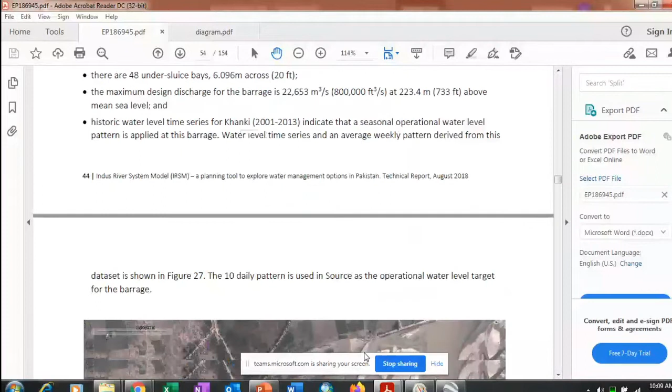I was seeing this aerial view of Khanki Barrage before class. If the cursor moves along Khanki Barrage and you observe the upstream side, there are several islands formed between the guide banks, between the two abutments.

It happens that after construction of the barrage, we provide a width according to Lacey's equation, but the design discharge is lesser than this. The actual discharge is most of the time lesser than the design discharge during most of the year. So sediments start settling, and as time goes on they form small islands, reducing the width of flow or available width of flow.

If the available width of flow is reduced, whenever the design discharge occurs velocities will be increased, creating smaller channels. You can see separate channels upstream of the barrage—one, two, three, four different channels created just upstream. So for the design discharge, velocity will be increased whenever it occurs. To safeguard against this...

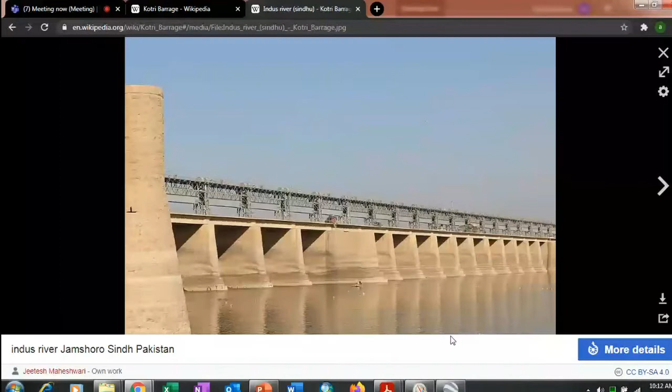Students, it's another photo of Kotri Barrage. We cannot right now see the weir constructed—this is the upstream side of Kotri Barrage. On the upstream side, a pool has been created, so this water will pass through the weirs or below the gates, passing in between these spaces.

The space between each two different piers is termed a bay. Here it's one, two, three, four, five, six, seven, eight, nine, ten different bays. Here is a divide wall—it's a thicker wall, see here.

Kotri Barrage is on the Indus River, located in Sindh province. The barrage was completed in 1955. It's used to control water flow in the Indus for irrigation and flood control purposes. It has a discharge capacity of 875,000 cusecs, whereas in our case it's 500,000 cusecs. It's a gate-controlled weir-type barrage with a navigational lock.

There is a navigational channel—I showed you in the last class, and I'll show it to you again.

The barrage has 44 bays—these open spaces number 44. Each is 60 feet wide. The maximum water level on the upstream side is 13 meters.

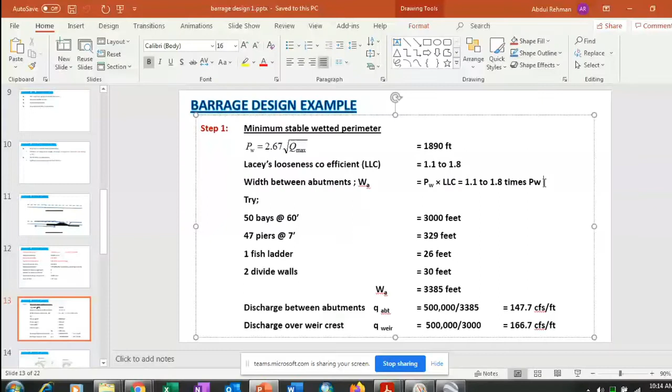We have to proportion that 3,400 feet to accommodate bays, piers, fish ladders, and divide walls. So let's try a few values: 50 bays at 60 feet. For 50 bays, we'll require 49 piers, of which two will be divide walls.

A fish ladder can be provided along the divide wall. Some generally used dimensions are assumed in the book, and you can use the same values. Summing all these 3,000, 329, 26, 30 feet, the width between the abutments is 3,385 feet.

This width of 3,385 feet is just upstream of the weir, and the 3,000 feet is the clear width available for flow. So the specific discharge upstream of the weir will be discharge over the width available for flow on the upstream side, and discharge over the crest will be discharge over the width of the weir available for flow to occur. I have calculated these two discharges.

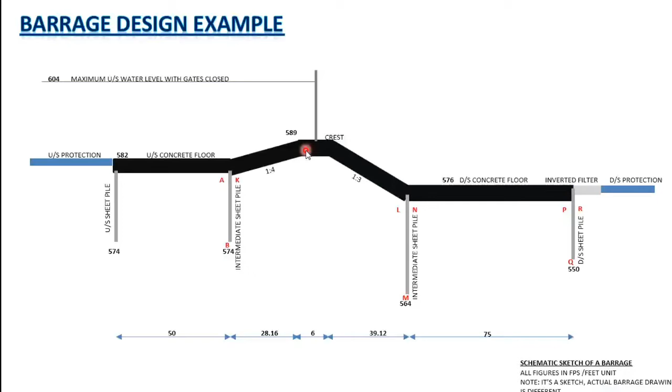It is 589, the crest level that has to be estimated and designed after applying knowledge of hydraulic engineering, which we have already studied. So for that, I'll start by assuming a value of afflux and weir height.

Afflux is the rise in water level after construction of a weir. Initially, the solid line is the riverbed level and the dashed line is the highest flood level. After construction of a weir, the water level will rise. This rise in water level is termed as afflux, and the highest value just upstream of the weir is termed as afflux.

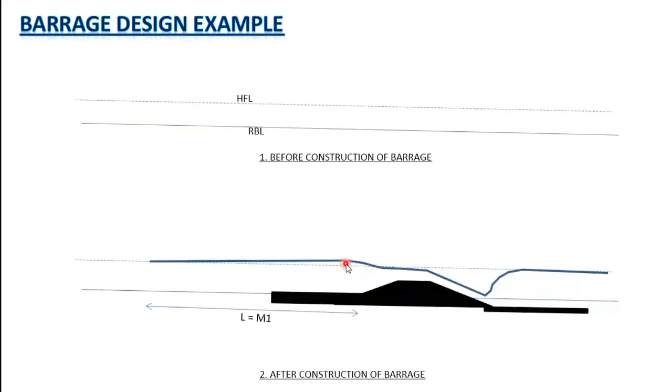We have to start by assuming a reasonable value of afflux. For us, right now doing the first design of a barrage, having not seen any barrage design before, assume this value as 3 feet for your design case, selecting it between 2.5 to 3.5 feet. After carrying out other design calculations and seeing what is actually happening at site, you can easily estimate this afflux value. This assumption is based on technical experience.

Another weir height is assumed as 6 feet. Both these values are assumed just by judgment, engineering judgment and experience.

Scour depth is the depth of flow after scouring has occurred. Please remember this thing, that scour depth is depth of flow.

If I mark scour depth on this sketch, scouring or erosion has occurred and it has created a pit like this.

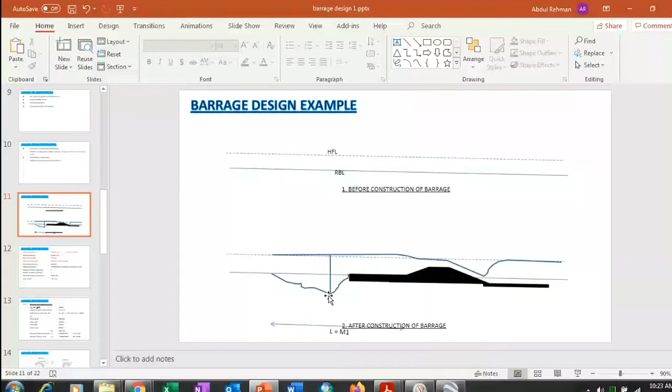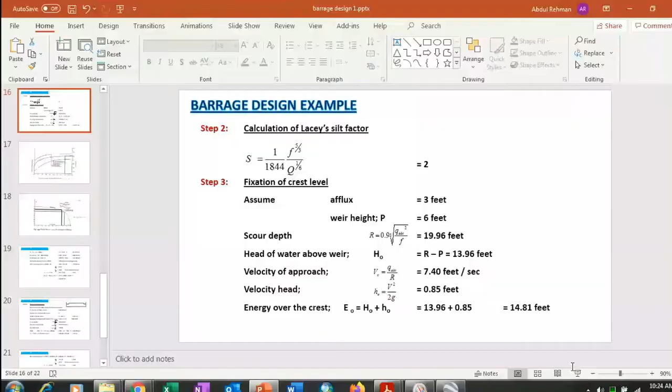For scour depth, Lacey's theory gives us an expression for calculating scour depth, that is 0.9 times cube root of discharge squared over Lacey's silt factor.

Here, which discharge should be used? In the last step, we calculated two values of discharge: the discharge just upstream of the weir, and the discharge passing over the weir. Any guesses which discharge should be used here for calculating scour depth?

Upstream wala, exactly, upstream discharge. Upstream is the discharge between the abutments. That is also mentioned here.

The scour depth is 19.96 feet. At 19.96 feet, this means the riverbed level is expected to go 19.96 feet below the highest flood level.

Head of water above the weir: in this case, I can say that head of water is depth minus height of my weir.

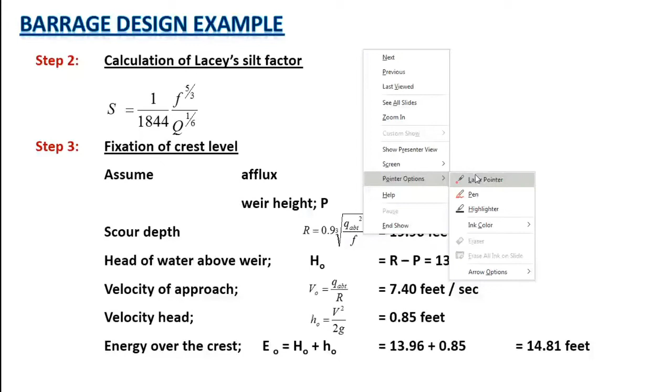Scour depth is the depth after the scouring has occurred. We are considering an adverse case scenario. The head of water above weir is calculated as the depth of flow, considering the depth of flow as the scour depth, and P is the assumed height of weir.

13.96 is the depth of water above the weir.

Velocity of approach will be discharge over depth. Discharge is the upstream discharge, or discharge between the abutments, and depth is the scour depth. This gives velocity of approach. Velocity head is v square over 2g.

Energy or specific energy over the crest is depth plus velocity head. In our book, the depth has been denoted as static head by capital H, and small h is denoting velocity head. So capital H, head of water, plus velocity head.

The total specific energy over the weir crest is 14.81. By our assumptions, we have calculated a value of specific energy which will be available over our weir crest.

E1 is denoting specific energy upstream of the weir. In the last step, I calculated specific energy over the crest. Next, I am calculating energy upstream of the weir crest. On the upstream side, I have in the previous step calculated velocity of approach.

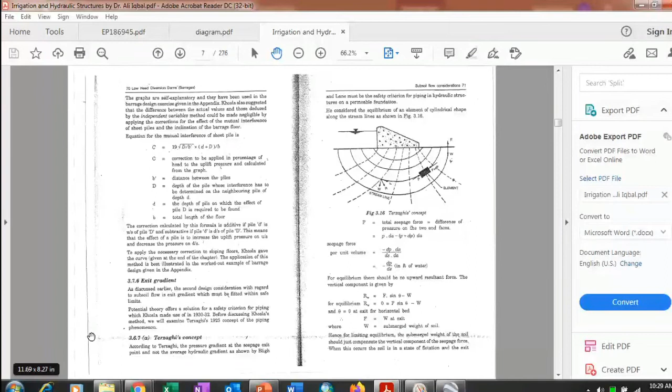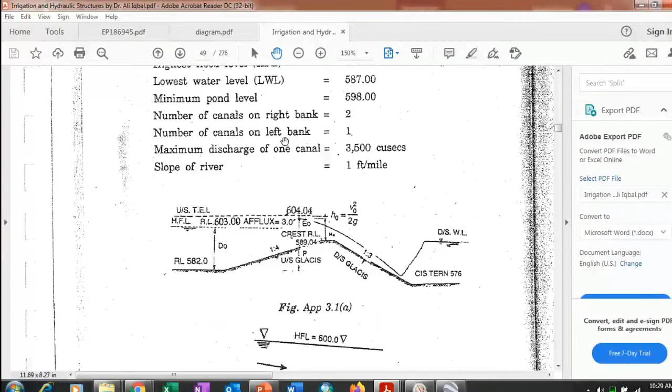In your books, this is explained on this sketch. Total upstream energy level has been calculated. The difference between upstream energy level and the specific energy over the weir crest decides our crest level of the weir.

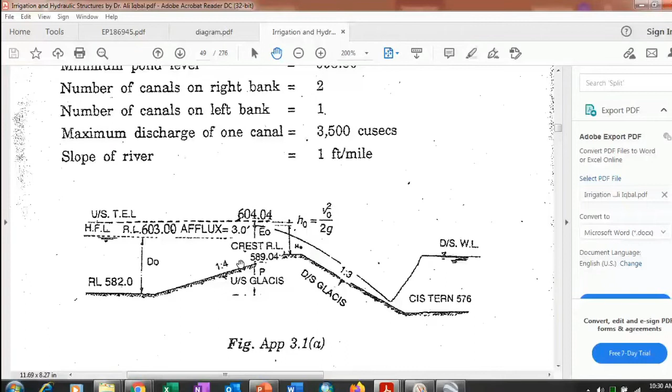After setting this crest level, we need to check whether our design discharge can pass over the weir or not. We have to apply the expression for calculating discharge over a weir.

For discharge over the weir, the expression was already studied in fluid mechanics: 2 by 3, root 2g, C, L, H raised to the power 3 over 2. Here 2 by 3 into root 2g and C are constant terms for a weir. So the expression for discharge over a weir is generally simplified as Q = C L H raised to the power 3 over 2.

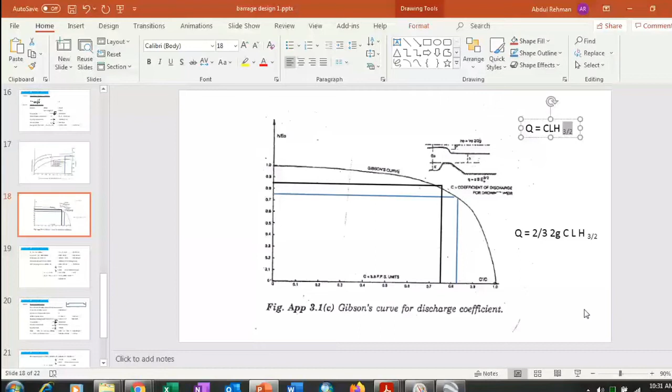I'll use this expression for calculation of discharge, where I am having a certain length of weir, which is 3000 feet. Head of water, we have calculated right now above the weir.

C is unknown. For seeing a value of C, I'll be using a graph that has been developed after experimental studies. This graph tells us a value of coefficient of discharge corresponding to various H over E naught, where the small h is denoting weir submergence.

Small h is the difference between the downstream water level and crest level. If the crest level is lower, the weir is submerged. If the crest level is above the downstream water level, it's not a submerged weir.

E naught is the specific energy over the weir crest. We have calculated a value of specific energy over the weir crest, and will be calculating a value of weir submergence. From the ratio of H over E naught, I can use this curve for determining, say for example, my H over E naught comes out to be 0.85.

Corresponding to a value of 0.85, I'll obtain a value of C dash over C, where C is equal to 3.8. C dash is the actual coefficient of discharge. So the coefficient of discharge is calculated in the next step.

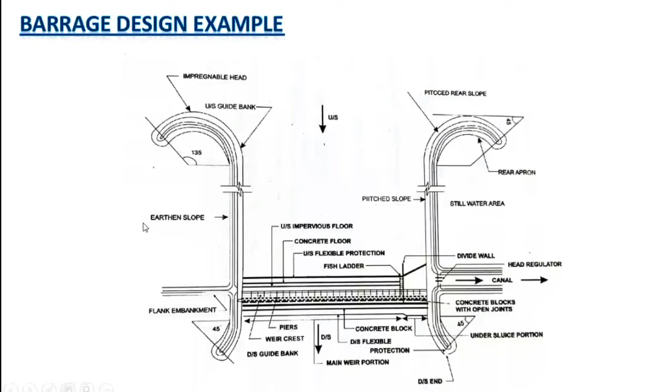The maximum downstream water level is 600 feet. This can be seen from a rating curve. For our case, 600 feet is the highest flood level without barrage. Without barrage, the downstream conditions won't be changing. On the downstream side, water will come back to its original water level, original depth of flow.

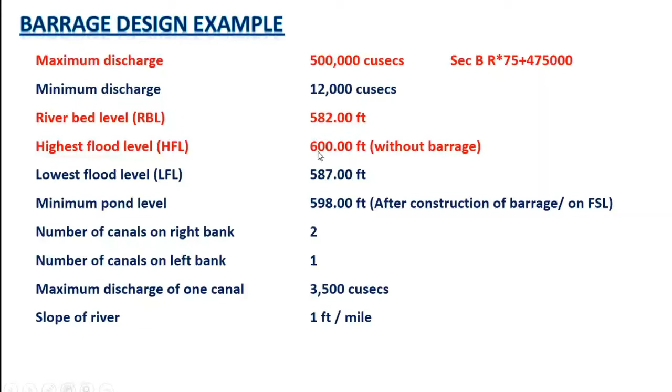This is figure 3.1 in the appendix. The appendix part of chapter 3 is a solved example of a barrage design.

For now, for normal state, the given value is the same. For design discharge of 500,000 cusecs, the water level or the highest flood level is 600 feet.

600 feet here. And I said that for seeing that Gibson curve, I need a value of weir submergence, that is the difference between downstream water level and crest level. Downstream water level is 600, crest level is 589.04. The difference is 10.96. This value of weir submergence is denoted by a small h.

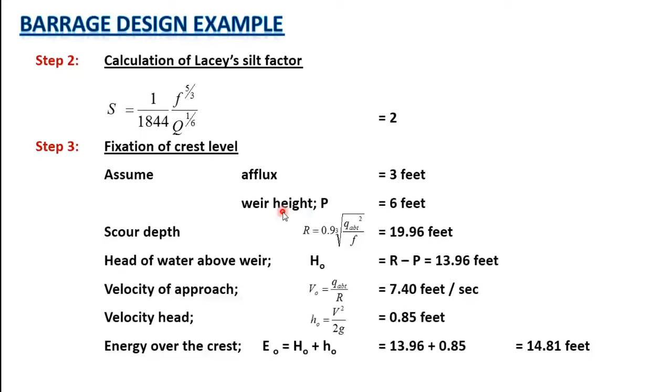If this value comes out to be lesser than your design discharge, revise the assumed value of weir height and afflux. We started this step by assuming a value of afflux and weir height. If the discharge value is less than our design discharge, repeat with revised assumed afflux and weir height. If it is greater than our design discharge, it's okay.

But sometimes it may happen that my design discharge is 500,000 cusecs, and this calculated value comes out to be say 700,000 cusecs - we are going way ahead of our maximum expected discharge. For further steps, be within plus 10%, don't go beyond that - be within plus 10 to 15% and don't go beyond that. But simply, if the calculated design Q value is greater than our design discharge, it's okay. If less, obviously this weir cannot pass that design discharge.

Next step is design of undersluices. We have discussed in parts of a barrage that the bays at the extreme end of a barrage are termed as undersluices. We'll again see this in review of the barrage. The bays at the extreme end are separated by divide walls.

Undersluices are always on the side where there is a canal. If the canal is only on one side, say if the canal was only on the left side, there would have been only one undersluice portion. If the canal is on both sides, we are having two undersluices.

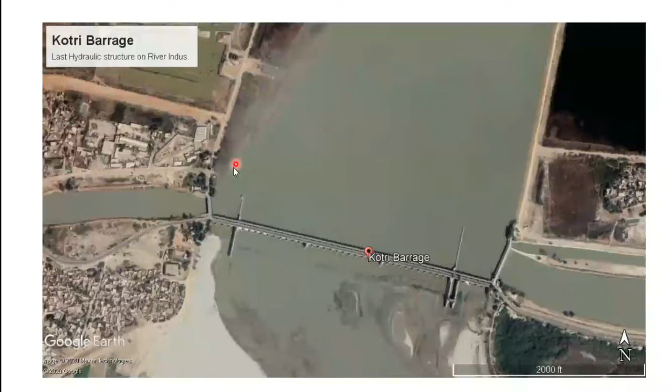Let's see photos of some other barrages also. If you see this Khanki barrage, there is only one undersluice on the left side.

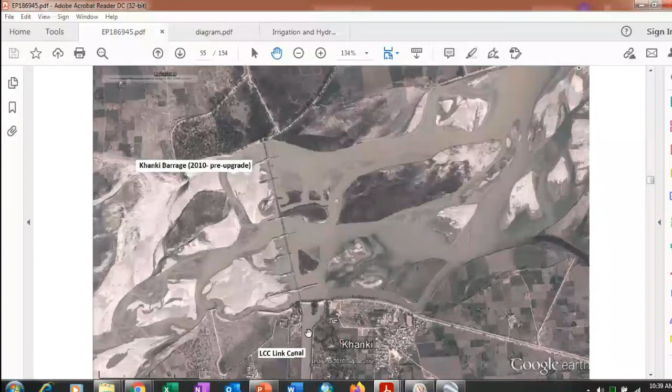It is an image of Rasul Barrage. Also for Rasul Barrage, the canals are only on the left side, so the undersluice is only on the left side.

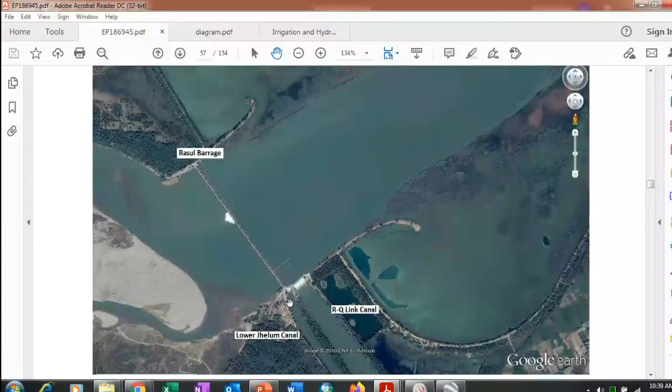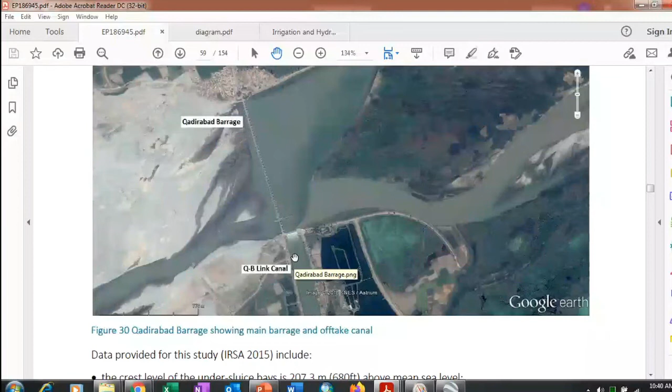For this canal also, this is Qadirabad Barrage. You see this Qadirabad Barrage. These curved walls - we have discussed them in our previous class.

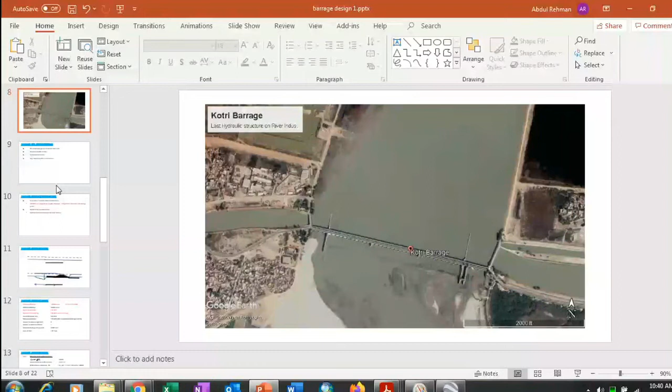We see again the guide banks. These are guide banks as discussed in our last class. These are guide banks of this barrage. The undersluice is only on one side, the left side, separated by a divide wall.

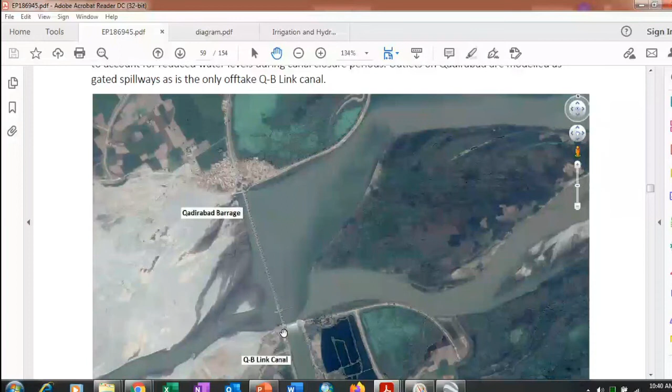The rest are normal bays, and let's see how many bays are undersluice for this barrage - there are 5 undersluice bays of 60 feet each. For this barrage too, there are bays at 60 feet, 5 undersluice bays.

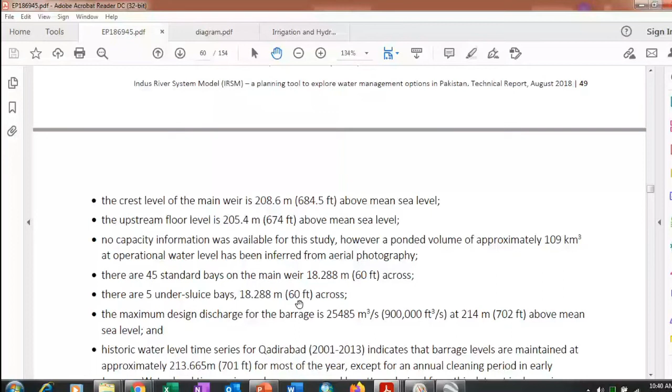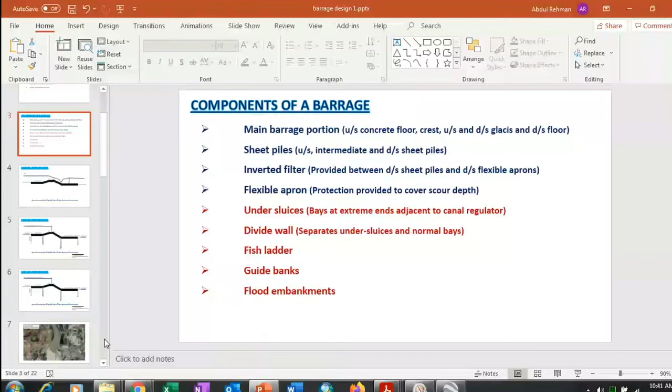So for our solved example also, for any design, we can start by assuming some number of bays as undersluice. The first step is fixing the crest level. The crest level of undersluices is kept lower than the main weir.

If this is showing the main weir, and there are two undersluice portions, the undersluices will be lower than the main weir. The purpose is to divert water towards the undersluice portion in case of low flow season. Whenever we have lower flows, if the weir was of the same height, the water would have been dispersed. If a channel is provided with a lower bed level, or if this weir height is lower, the flow will be diverted towards that lower height. So for this purpose, the undersluice portion is generally kept lower than the main crest level.

This design step is started by assuming some value lower than the main weir. In the last step, we decided the crest level of the main weir as 589. The crest level of undersluice is 589 minus 3, equal to 586 feet.

Assume some number of bays - right now it's just an assumption. So the total width of the undersluice, with each bay 60 feet wide, 5 bays, and 2 undersluices - one on the left side, another on the right side - gives a total width of undersluice of 600 feet.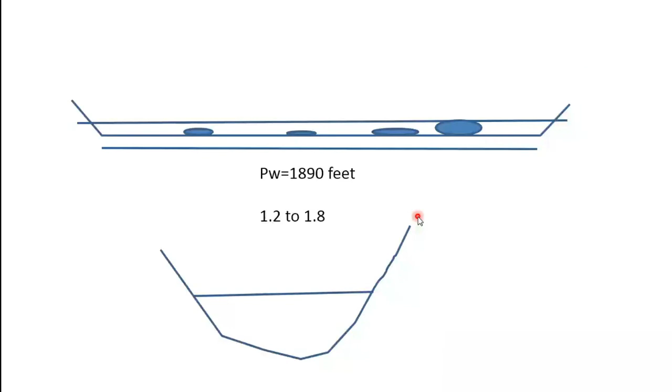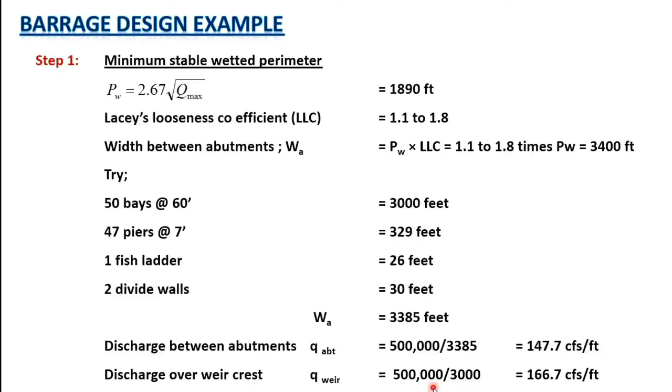So the discharge through undersluice - here we assume there is some concentration. The specific discharge over the weir is 166.7, and we have provided a lower weir height here. We assume some concentration to happen, about 1.2 times more than the main weir - 1.2 times 166.7, which is around 200 cusecs per foot.

Again, calculate the scour depth as in the previous step - scour depth for undersluice position, and velocity of approach for undersluice position.

For this velocity, use the value of discharge passing through the undersluice. Velocity is Q over Y, where Y is the depth, again assuming the scour depth as our depth of flow. Velocity head is V square over 2G.

Upstream energy level, again as done in the previous step, is riverbed level plus specific energy. On the upstream side, riverbed level noted by E1, which equals depth plus velocity head plus afflux. Riverbed level plus depth plus velocity head plus afflux. In the undersluice portion, the upstream energy level is approximately 604 feet.

E naught is the specific energy over the weir crest, which can be upstream energy level minus crest level of undersluice. We have already decided the crest level of undersluice, which is 586, 3 feet below the main weir. So specific energy here is 18 feet.

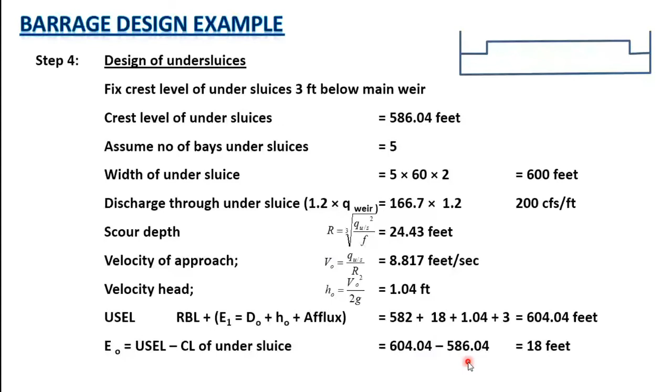Weir submergence is upstream energy level minus afflux minus crest level. If we do this, we can obtain a value of weir submergence. Upstream energy level minus afflux will be near to downstream water level minus the crest level, that is weir submergence. H over E naught is 0.83.

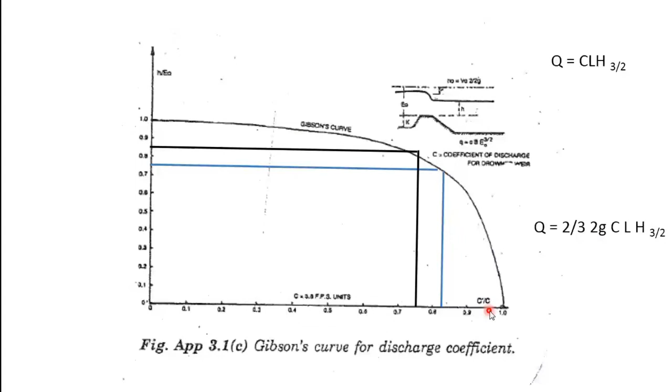For 0.83, consult the Gibson curves and get a value of C dash over C. This C dash has to be found out, and C is 3.8. For 0.83, C dash over C is 0.76, and C dash becomes 3.8 into 0.76, equals 2.89.

Discharge through undersluice, denoted by Q1 and Q3, and discharge through main weir denoted by Q. Discharge through undersluice is C dash for undersluice portion, W for width of undersluices only, E naught specific energy over weir crest for the undersluice portion. So discharge passing through undersluices is 132 cusecs.

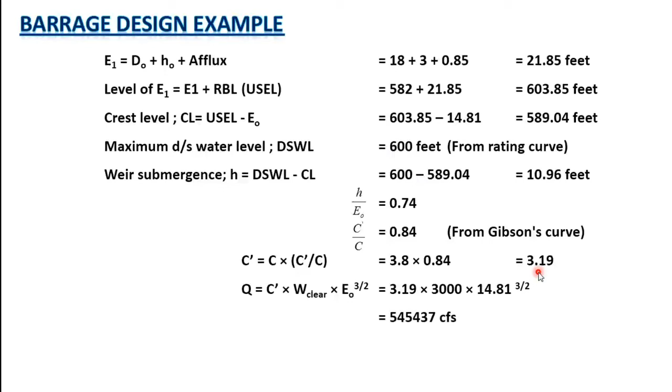Discharge through main weir, please remember here the C dash as determined in the last step. 2.89 is for undersluice, while 3.19 was determined in the last step using Gibson curve for coefficient of discharge. If our total width of weir is 3000, of which 600 is undersluice, 2400 is the main weir portion, we use E naught specific energy over the weir for the main weir portion, except the undersluice portion.

The discharge through main weir is 436, discharge through undersluice, whenever the maximum design discharge occurs, is 132 cusecs. Total discharge which this weir plus undersluices can pass is 569 cusecs. That should again be greater than our design discharge, not less than it. For my case, that is 500,000 cusecs.

For your case, it will be slightly different. You have to compare this value with your design discharge. Also, do not go beyond 10 to 15%, please remain within that range. The desired discharge should be greater than the design discharge but within 10 to 15% greater, not lower. If we go beyond that, we are providing extra safety.

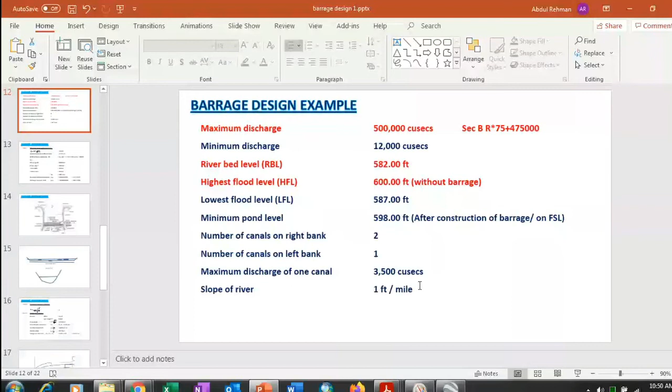We were discussing that there can be three different states of a river, as I will explain them later also: a normal state, a retrogressed state, and an accreted state. Normal, retrogressed, and accreted state. Retrogression and accretion were discussed in the last class, and I will be repeating the same thing. Okay, let's see this.

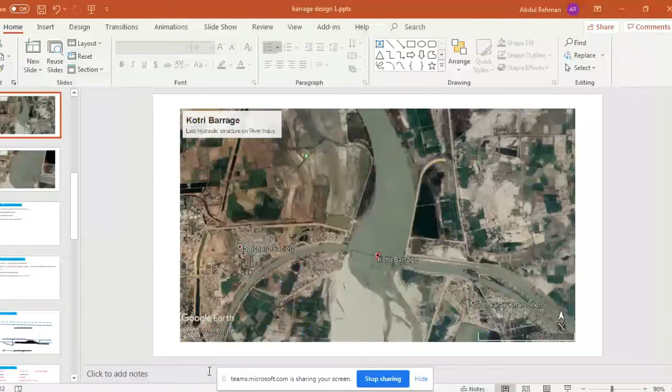We see the sketch of a barrage.

Construction of a barrage has raised the water level. Raising the water level for a value of discharge will reduce its velocities, causing sedimentation or silt particles to settle on the upstream side. Water passing over the weir carries lesser quantities of silt, so after flowing over, it picks up silt from the downstream side.

This may cause a scoured pit on the downstream side. This phenomena is termed as retrogression, and it's a reversible cycle.

As time passes, the height of these sediment layers increases, which will again increase the velocity. Increase in velocity will cause erosion of this settled sediment, and these eroded sediments will again be settled on the downstream side, bringing the river back to its original position. This is termed as retrogression, and the opposite phenomena is termed as accretion.

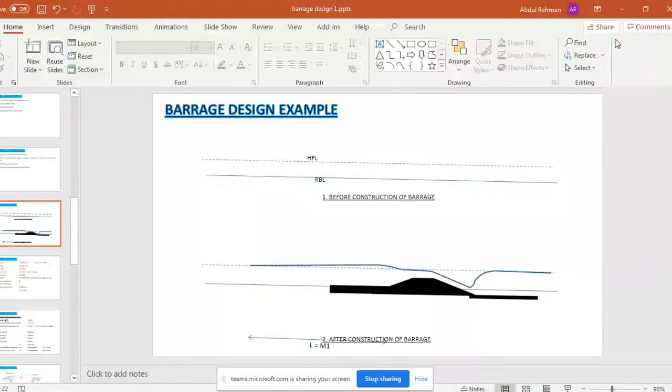We have to see our barrage for all these three states: what will be the situation in the normal state, what can happen in the accreted state, and what can happen in the retrogressed state.

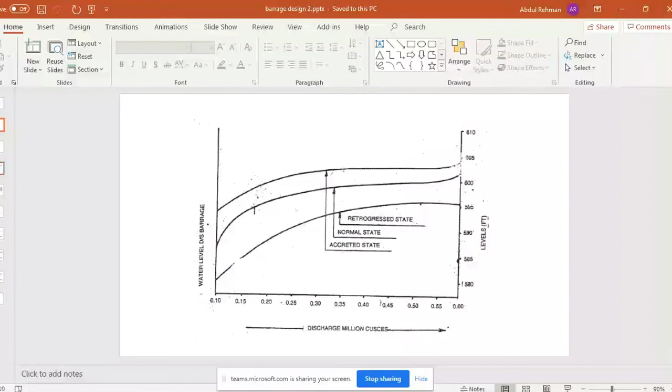For this, the fifth step is determination of water and energy levels. Right now we have water level for only one state, the normal state.

Water level is the existing water level plus the assumed value of afflux. That is our water level right now, and we'll be carrying out further calculations in tabular form for normal state and a discharge of 500,000 cusecs.

For a value of design discharge, we have a value of water level, but we do not have water levels for lower discharges. We have a water level for 500,000 cusecs, but not for 250,000, 125,000, or other lower discharges.

Also, we haven't estimated what can happen if discharge greater than design discharge occurs. The first column tells us this value has to be inputted: 1.2 times design discharge, which is 20% greater than design discharge.

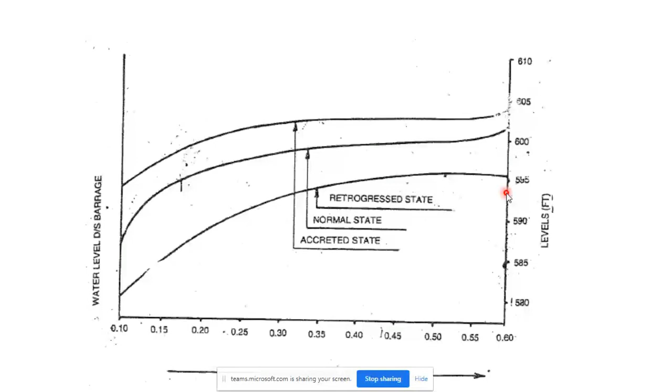Fill the second column of this table with the help of the rating curve given — it should not be called a hydrograph, it's a rating curve.

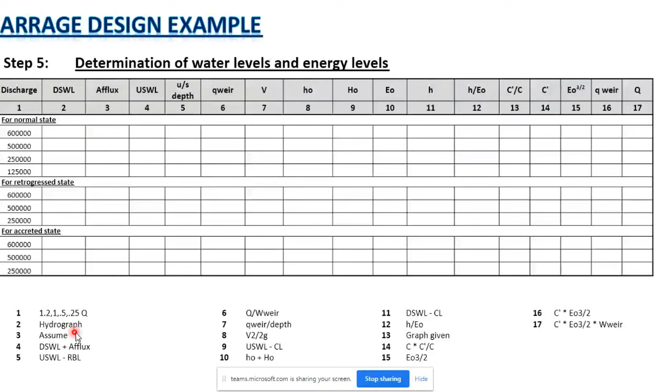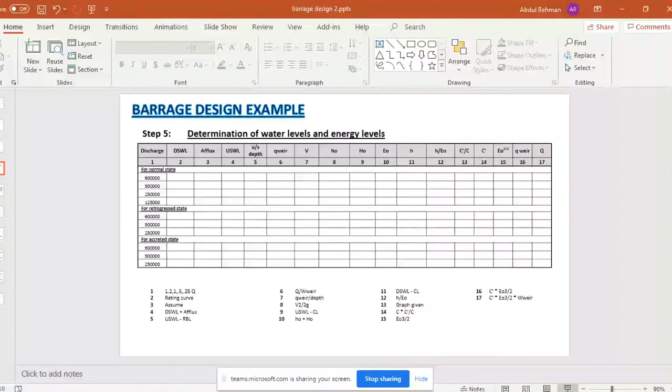On this next slide, I'm showing this table filled with our values. The downstream water levels are seen from this rating curve. The third column is the assumed value of afflux.

It's an assumed value, as was done in step 4 where we were setting the crest level. We assumed a value of afflux. Start with the first value — the assumed value of afflux is 2.5.

If the assumed value is 2.5, the upstream water level will become the downstream water level, which is the water level in absence of barrage, plus afflux, giving the upstream water level. Upstream depth will become upstream water level minus riverbed level. These are explained at the bottom as well — column 5 is upstream water level minus the riverbed level.

Column 6 is the specific discharge over the weir — discharge as in column 1, divided by the width of the weir, which is 3000 for the total weir.

Explained at the bottom also, column 6 is Q over weir, Q over width of the weir. Column 7 is velocity, velocity is Q over y, using y as the original depth of flow when normal. Q is discharge, y is depth of flow.

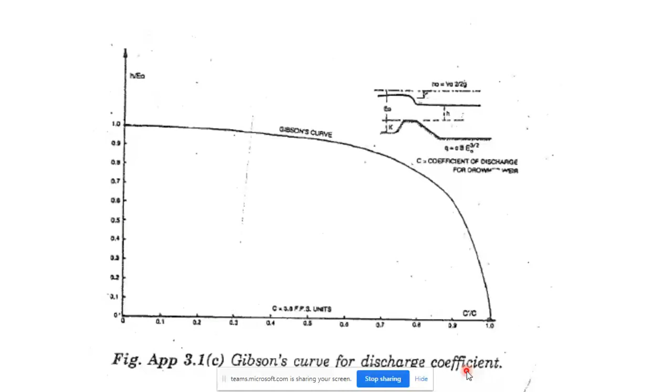H over E naught is determined to consult this curve for getting a value of C dash over C. For this H over E naught, see a value of C dash over C that is written here. C dash is 0.8, this column 13 into 3.8. Column 15 is simply E naught raised to the power 3 over 2. 16.24 raised to the power 3 over 2.

The last column, 16, discharge over the weir, is mentioned at the bottom also: C dash into E naught raised to the power 3 over 2. The total discharge is C dash into E naught raised to the power 3 over 2 into width of the weir. Specific discharge will be C dash into E naught raised to the power 3 over 2, without the width of the weir. Column 15 into width of the weir, column 14 into column 15, that is specific discharge over the weir. Total discharge is specific discharge multiplied by width of the weir. For my case, that is 3000.

In this table, there was one assumed value. You have to change this assumed value until column 1 is equal to column 17. For example, if I assume the value of afflux as 7 here, the value in column 17 would have been very much higher than in column 1. We have to compare column 1 and 17 and keep repeating our trials of the assumed value of afflux until column 1 and 17 are near to each other.

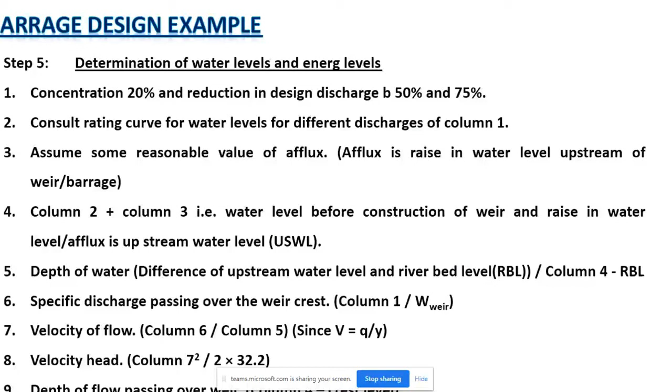Let's see what column 8 plus 9 gives. Specific energy is velocity head, as capital H is denoting depth, plus head of water. So specific energy is 8 plus 9. Column 11 is weir submergence.

This gives total discharge. The column mentioned at the end, 17, should be equal to column 1. If not, revise the assumed value of afflux in column 3.

A very important thing to remember here is every time afflux is changed, H over E naught also changes. H over E naught was calculated to see a value of C dash over C from a curve known as Gibson curve. So every time you change the value of afflux, you also need to see a value of C dash over C corresponding to H over E naught.

H over E naught will also change, so revise the value of C dash over C also, then see what is the discharge. You may require 2 or 3 different trials to reach a nearer value.

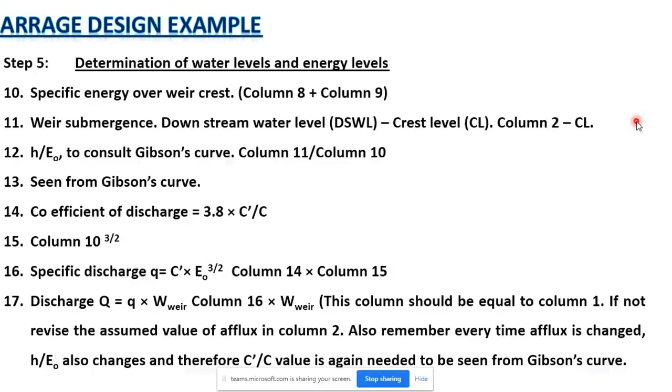The same thing has to be done for the undersluice portion as well. First column, the input discharge passing through the undersluice with 20% concentration, is estimated at the end of step 4. This discharge, which we calculated in previous slides as passing through undersluices, I'll show you was around...

132,000 cusecs. Rest of the table is similar to the previous one, except that here instead of width of the weir, for calculation of discharge, we'll be using the width of undersluices.

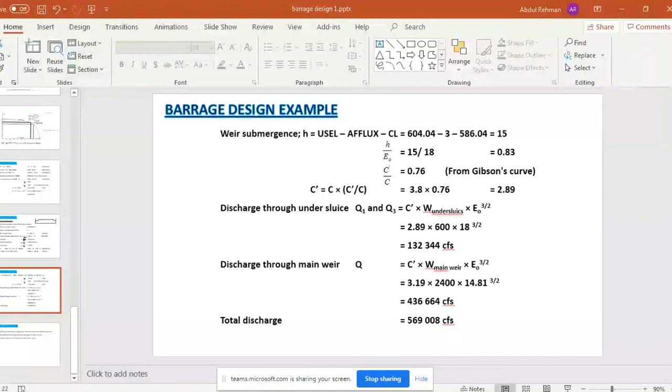The discharge passing through undersluices was calculated when we were setting the crest level of undersluices. That is multiplied by 1.2 times the 20% concentration: 132 multiplied by 1.2.

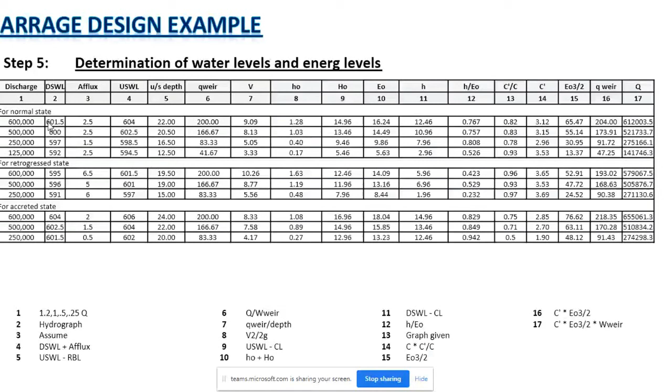Downstream water levels, keep them the same as for the normal retrogressed state. As I'm saying, for 1.2 times concentration, that means 600,000 cusecs. So downstream water levels are 601.5, 595, and 604.

Rest of the calculations are the same. Assume a value of afflux, compare column 1 by column 17. If they are near, it's okay. If they are not near, try to stay within plus 10 to 15%, not greater than that.

So do you see any mistake in this table? Any student, please see column 1 and column 17.

If you see this table, column 1 and 17, I have done a mistake here: I have multiplied for the retrogressed depleted state by the width of the weir as 3000. 3000 is the total width of the weir.

Remember, most students will prepare the first table, then copy it, paste it again, and change the values. While changing the values, remember to change the width of the weir and multiply the width used in column 17 as the width of undersluices here, as mentioned at the bottom also. Rest of the calculations are the same.

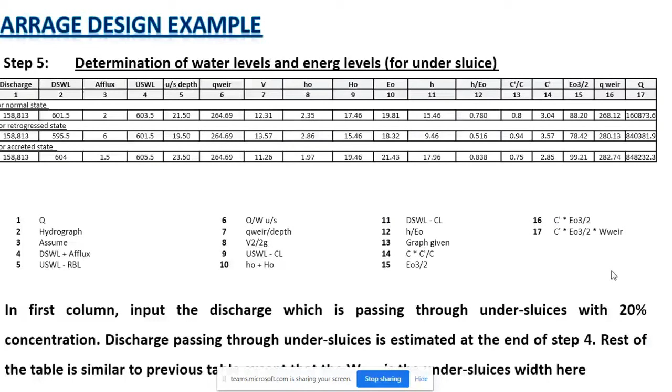So in total, you have to determine energy levels of the main weir and undersluices portion. In discussion it might have taken some time; we have given almost 1.5 hours today and an hour earlier also, so we have discussed this for almost 2.5 hours.

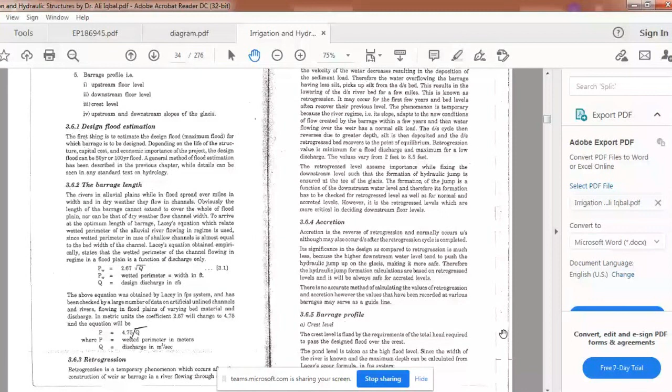But if you see these calculations solved in the book, that won't take more than an hour. You have to give at least around an hour to this chapter.

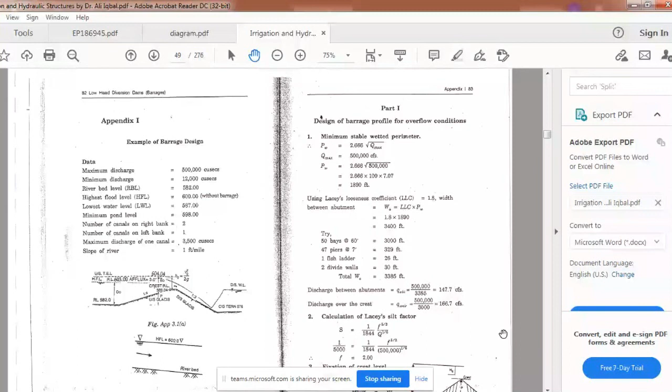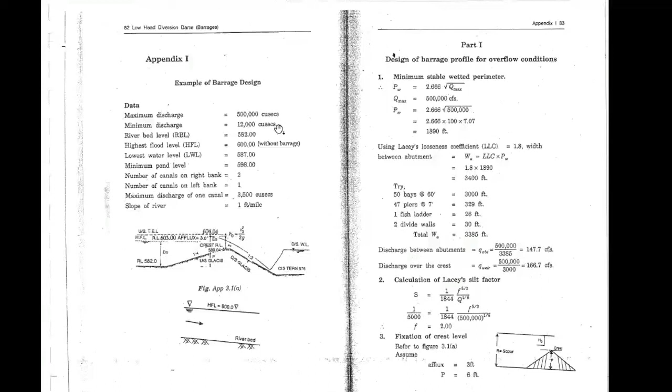You will be having a slightly changed value of design discharge, maximum discharge, but the rest of the values will be the same. Please keep this book in front of you and start with your value of discharge, and solve up to step number 5. That is done on pages 1 through 7 in the book.

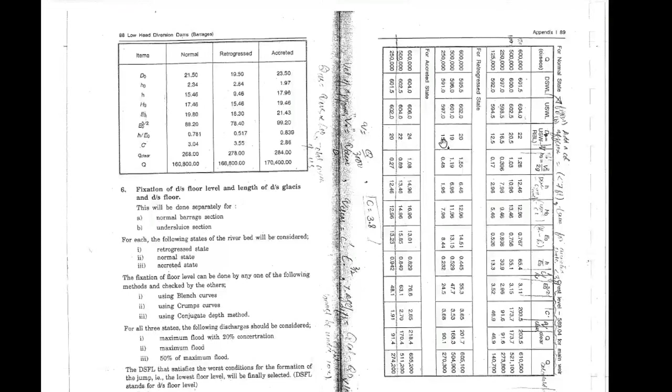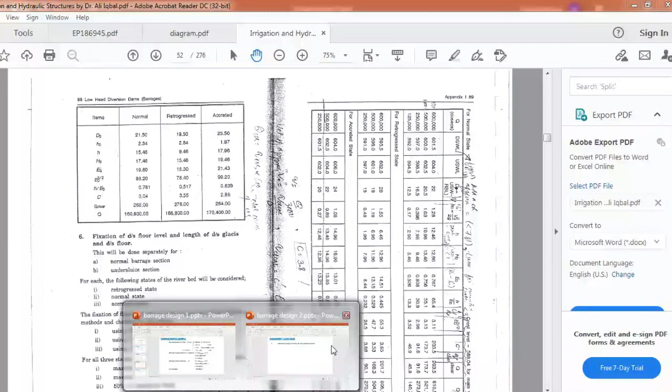For these tables, you can use Excel also. Prepare these tables; both of these tables are very important for our further calculations. In the next 3 classes we'll be picking values from these tables for further calculations.